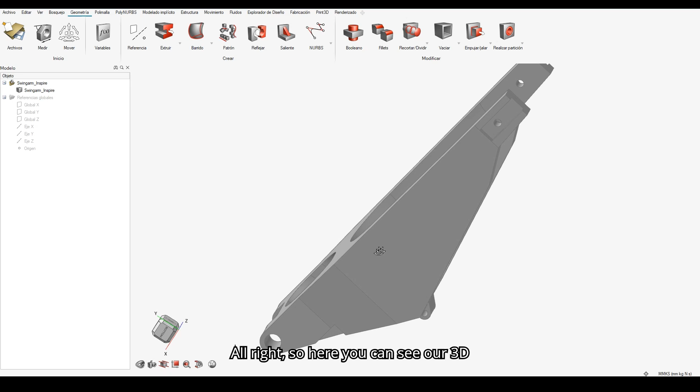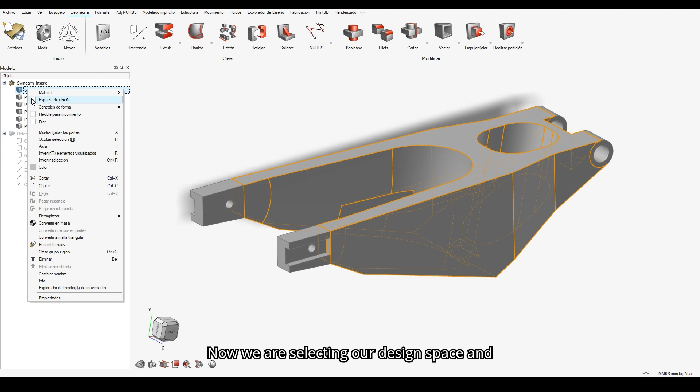Alright, so here you can see our 3D model, and first of all we're going to make some partitions in the swing arm axle and now in the suspension system holder. Then with the help of the cutting tool we're going to make some more. Now we are selecting our design space, and that would be all the preparation our model needs.

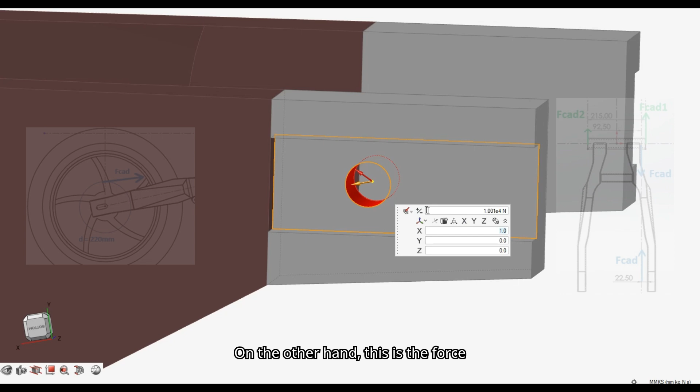Now it is time to add some supports and forces. For example, this one is generated by a suspension. And these are both the components of the forward and normal force of the bike. On the other hand, this is the force produced by the chain of the bike, and actually it is the biggest force we will apply over the swing arm, at 10,000 newtons in total.

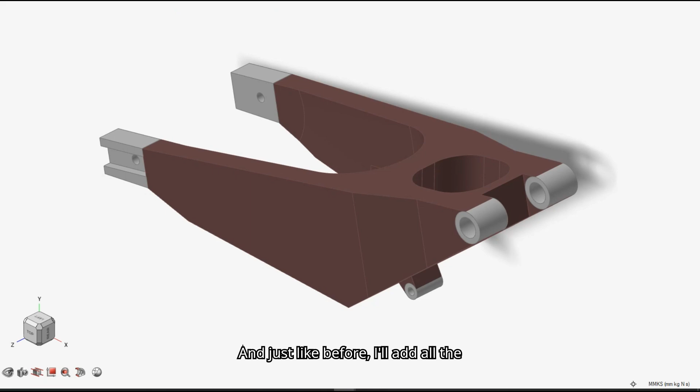All of these forces are related to the maximum acceleration scenario, but I will also create two more scenarios, one for left turns and another for right turns. And just like before, I will add all the necessary supports and forces for these new cases. More specifically, these are the forces that the motorcycle experiences when turning right. And obviously, the left turning case is exactly the same as this one, but mirrored.

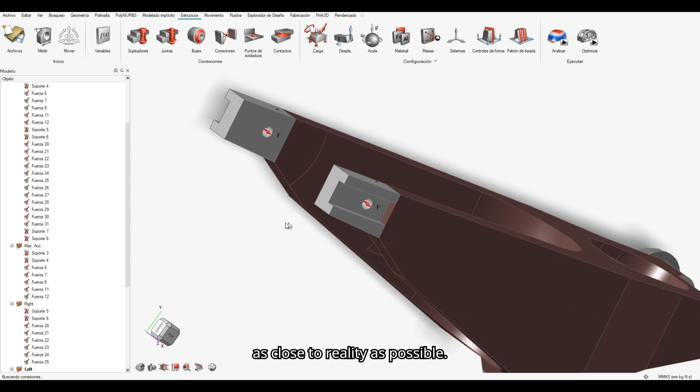Now it's time to add a couple of fasteners in both axles, to make the model as close to reality as possible. As for the material, we'll be using this aluminum alloy, which is commonly used in SLM, or selective laser melting, the method we are going to use to manufacture our swing arm. In addition, I will apply a split draw direction to the model. And finally, everything is ready to start optimizing.

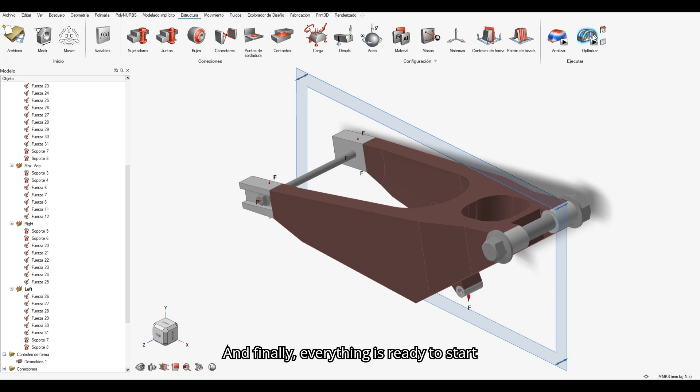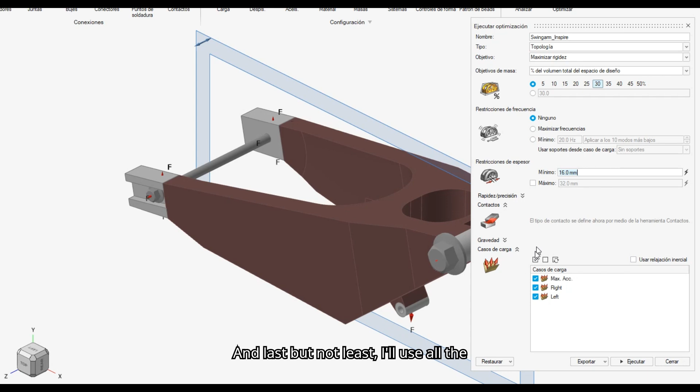I'm going to conduct a topological optimization with the purpose of maximizing stiffness. And after some trial and error, I've discovered that a target of 30% of the original mass is the best option. On the other hand, for the thickness, I will select a minimum of 16 mm and a maximum of 32. It will provide a perfect balance between precision and processing time. And last but not least, I will use all the load scenarios I presented before. And there we go, we have our optimization running.

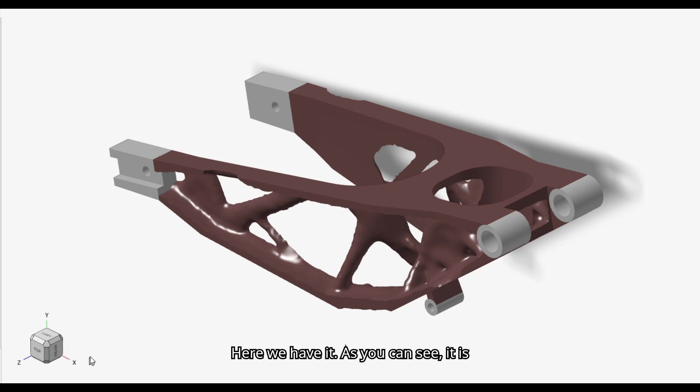So, after waiting for some time, our optimization is ready. Here we have it. As you can see, it is truly unique, and its shapes are fascinating. And by the way, it's not symmetrical. The reason being that the force of the chain is mainly applied over the left side, making it thicker. And after some PolyNURBS tweaking and rendering, this is the final result.

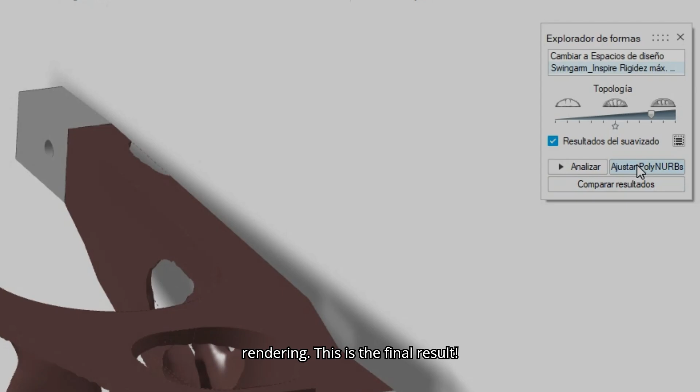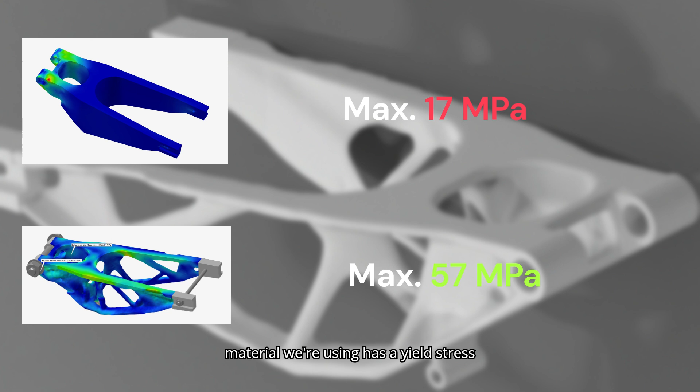And now onto the good part. How good is our optimization? Well, let the results speak for themselves. After conducting a von Mises stress analysis on the original and optimized swing arm, it is obvious that the first one is way too strong, especially given the fact that the material we are using has a yield stress of 200 megapascals.

In the same way as before, we can see that the original swing arm has a way too big safety factor, and the 3.5 the optimized one has is more than enough for us. This is when it gets interesting. With a final mass of only 3.7 kilograms, we have managed a staggering 70% weight reduction.